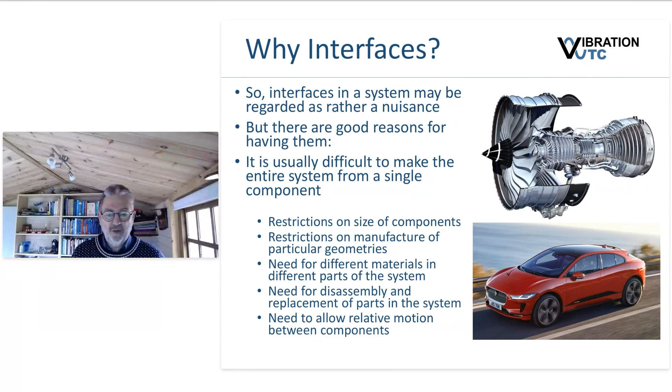If you look at something like that aircraft engine, and I've done a lot with aircraft engines over the years, you'll see there are thousands of interfaces in that system. The problem is they're not easy things to model. It turns out that one of the principal remaining uncertainties in our predictive models of complex systems is the behavior of the frictional interfaces there.

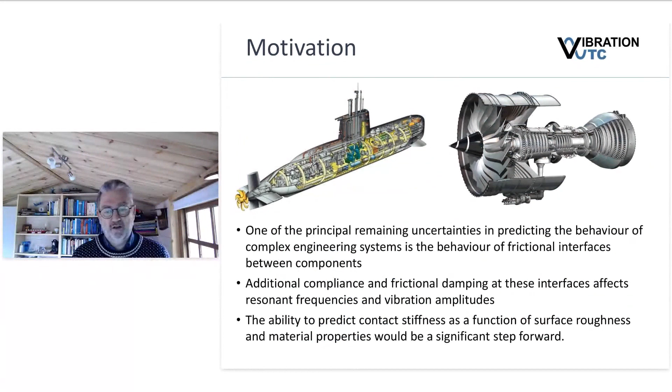These frictional interfaces do two things. They introduce compliance into the system, more compliant both in the normal and tangential direction than if we made the two components as one. Fortunately, the friction also introduces some damping at the interfaces, which is helpful from a dynamics point of view. But the trouble is it's non-linear, so that's a bit of an issue for us. The ability to predict contact stiffness as a function of surface roughness, material properties, and perhaps load would be a significant step forward in getting some of our uncertainty out of our predictive models of systems.

But unfortunately, from a vibrations perspective, we want to see some damping in our system because we would like our mechanical energy, our vibration energy, turned into heat and dissipated. In this second case, the worst system we can possibly have is one with either zero or infinite friction, because neither gives us any frictional damping. So we've got these competing requirements — if we try to design our interfaces, we find we're up against competing requirements depending on whether we look at the system from a solid mechanics point of view or a dynamics point of view. And in terms of structural integrity, the system behaves as a whole, and both of these issues are important.

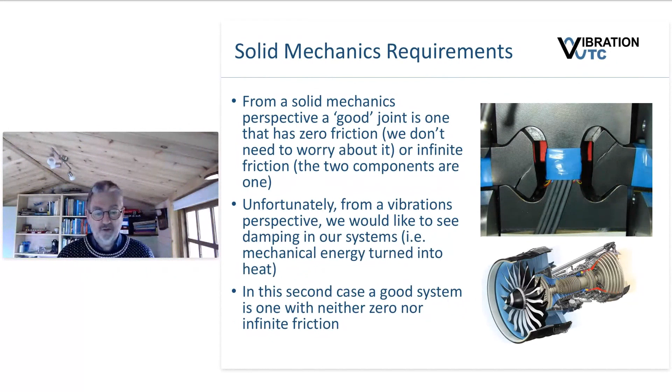You'll be familiar with this equation if you go back to your undergraduate studies: M x double dot plus C x dot plus K x equals some periodic force. This is the fundamental dynamics equation of vibration. I quite like it because it's got two of my heroes in it, Isaac Newton and Robert Hooke. Newton said force equals rate of change of momentum, or effectively in our case with fixed mass, force equals mass times acceleration. And Robert Hooke said, effectively, force equals stiffness times extension.

So those are those two terms, and the term in the middle, the C x dot term, is a linear damping term, which is what we get from viscous damping, linear viscous damping, like in a shock absorber in a car or something like that. That's fine, but our frictional interfaces are not going to behave in a linear fashion — in fact, they're anything but linear.

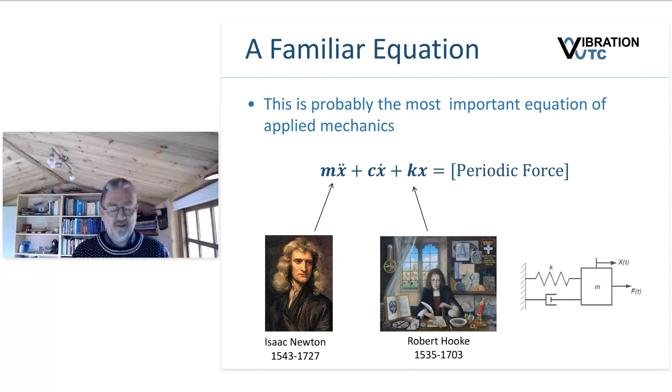Now, the normalized amplitude of response of a system depends on the frequency and on the amount of damping. You'll be familiar with this one-dimensional, single degree of freedom system here with a mass, a stiffness, and some damping. What you see is that as you increase the damping, the magnitude of the resonance comes down, and also the natural frequency changes.

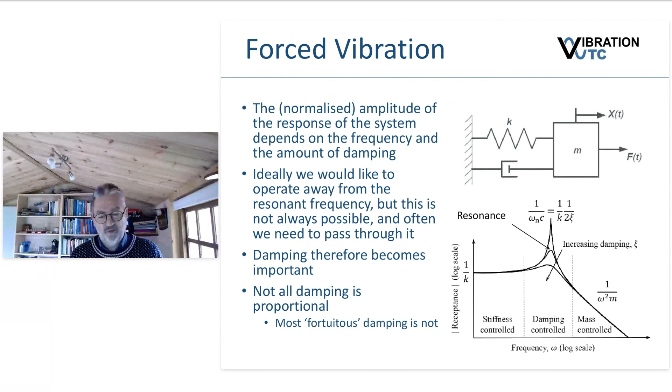Therefore, it's important to know what the damping is doing, what level of damping we have, and what's the effect on system behavior. But as I said, most real damping is not proportional, and so we need to understand what's going on a bit more carefully.

Now, I had a little video for this, but I was asked not to put videos in the slides. But fortunately, I do have the two gin glasses here, so I can actually do the demonstration for you.

So this is a standard gin glass, no gin in it, unfortunately. But anyway, this is one that I pinched from the sideboard. And if I hit it, hope you can hear that, it rings very nicely like a bell.

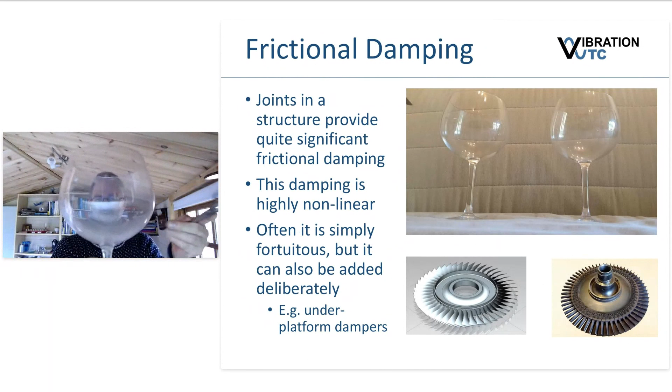This is one that's got a crack in it. You may be able to see the crack, you may not, but I'm going to hit this now. And what you can see is that it behaves completely differently. The main reason it doesn't ring is because there's a significant amount of frictional damping in the system. And sometimes in our systems, we have this kind of fortuitous damping.

So you'll see on the right-hand side that's a turbine disc with some blades inserted in it. And on its left, you'll see what they call a blisk, which is an integral bladed disc. Very nice because we can make the whole thing as a single component - it's cheaper to manufacture, lighter, and so on. But I think you can imagine that that one is going to ring a bit like our intact gin glass, and therefore we can expect significant vibration problems with that type of component compared to the system bottom right.

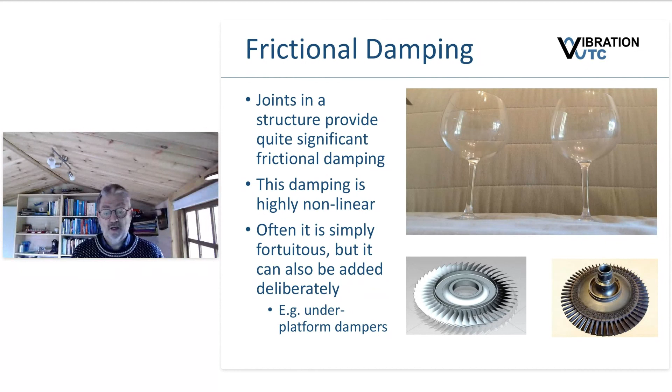Frictional hysteresis. What we find is that friction varies even during a simple cycle. So what we've done here is basically some reciprocating tests - we take two bodies and simply rub them against each other backwards and forwards in a fretting situation.

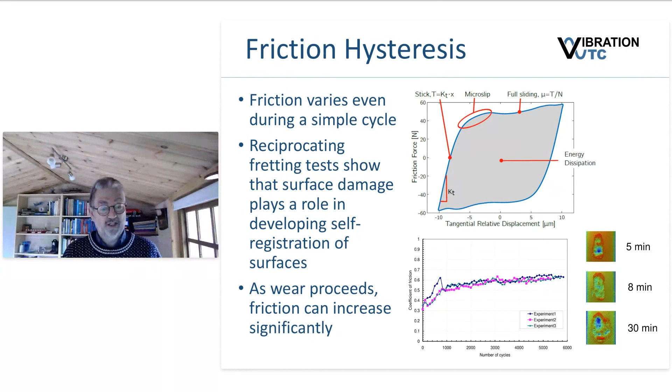As wear proceeds, as we get surfaces interacting like this in sliding, we'll get wear. And as wear proceeds, what we find is that the size of that hysteresis loop, characterized by the coefficient of friction, increases with the number of cycles, primarily because the real area of contact is increasing significantly. You can see that bottom right of the slide where we have wear scars at 5, 8, and 30 minutes into a test, and the real contact patch basically ought to be that complete square that you're seeing.

In terms of frequency response functions, the contact has two main effects on the vibration behavior. One is that the nonlinear frictional damping reduces the amplitude, and secondly, the presence of the interface makes the assembly significantly less stiff than if it were monolithic geometry, so we get a change in the natural frequency.

The other thing we find is that the effect depends on the state of the interface. So you can see here on the right hand side and in the main graph here, that the wear has shifted the natural frequency. It's reduced the amplitude in some cases, but particularly around this 180 hertz peak here, you'll find that there's been a quite significant increase in the natural frequency.

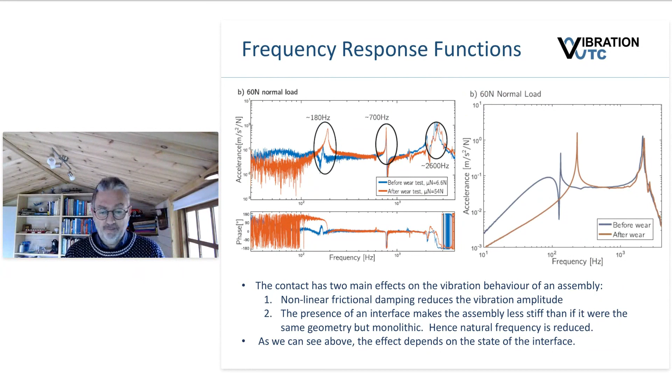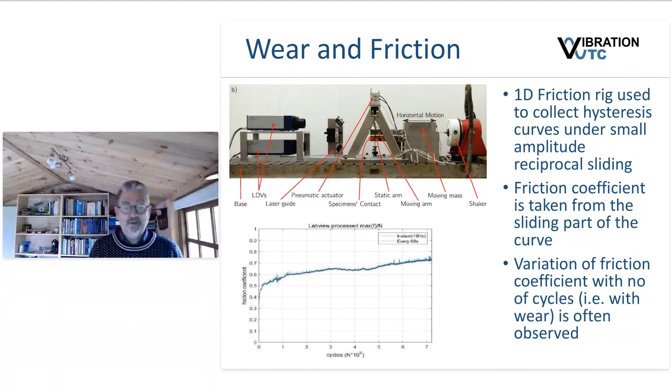So this is our little 1D friction rig, developed originally by my colleague Christoph Schwingshackl and his students. We use this to collect hysteresis curves under small amplitude sliding. And here again, we see the variation in friction coefficient as the experiment proceeds, basically as wear is taking place.

The behavior of frictional contacts is very complicated, but let me take you through what we hope to achieve in our research. We start with motivation, which is to understand the joints. We do some experiments, reciprocating type experiments often. We take measurements and characterize the surfaces. This is a toroidal ring on a flat, and you can see how the wear has proceeded. Then we try to do some modeling, and finally validate those models. That's what I'm hoping to take you through in the rest of the slides.

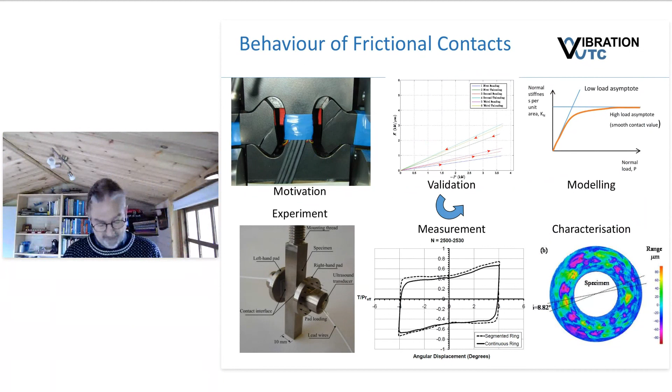My involvement with Imperial goes back a long way, and we had a joint project with Imperial many years ago. What we were trying to do was measure friction and compliance effectively on the same surfaces, but with different equipment. The Oxford equipment on the left is largely very low frequency equipment. It's quasi-static, relatively large contact, large forces, and so on. We measured displacement by digital image correlation or by a remote LVDT.

On the right is an earlier incarnation of the Imperial rig, and you can see that the contact area is much lower, 1 millimeter squared. Frequency is much higher, so it's a dynamic experiment, with much lower sliding distance, and displacement measurement is done by integrating laser Doppler velocity measurements.

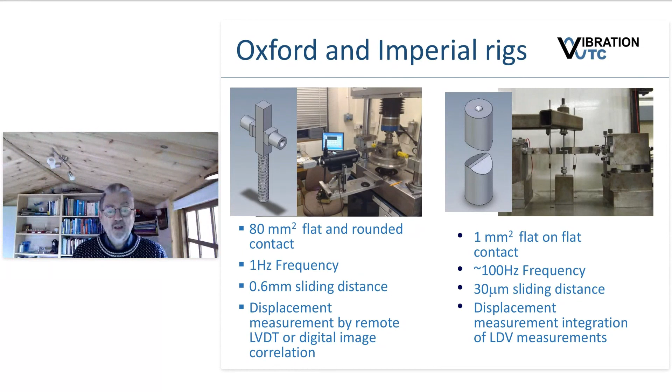Now, the results are quite interesting, particularly these two graphs on the right. What we've got is one surface with respect to another, and you can see that within the specimen, the vertical displacement under the normal load is approximately linear with position. Then as we go to the other side of the interface, into what we'd call the fretting pad, again we have a pretty linear displacement variation with position. That's what we'd expect if the two surfaces are being squashed together.

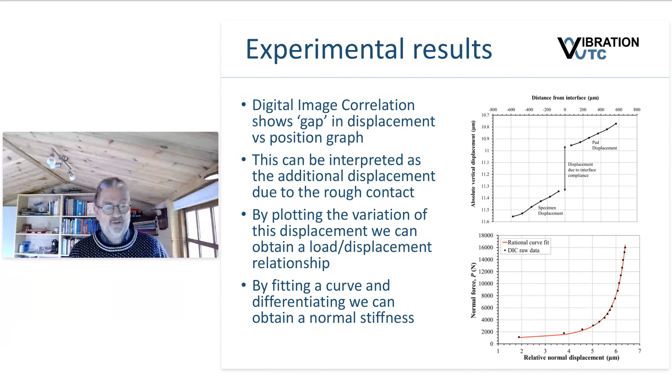But we have a big jump in between. That displacement jump is effectively due to the compliance of this rough contact layer, all these asperities which sit against each other on the surface itself. Bottom right, you can see that not only do we get that jump, but it varies with normal load, so that as we apply more and more load, the surfaces get closer together, as it were. So in order to bring them together by 6 microns relative to each other, we have to apply a very, very high force.

And so there's the normal stiffness. We can measure it that way with digital image correlation, and we can also do a little measurement with ultrasound - these were some results that Daniel Mulvihill got. You'll see again we're getting the same kind of effect where the normal contact stiffness is increasing more or less linearly with contact pressure or with load.

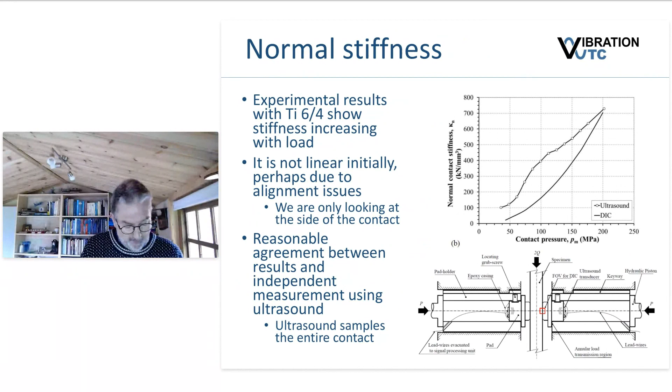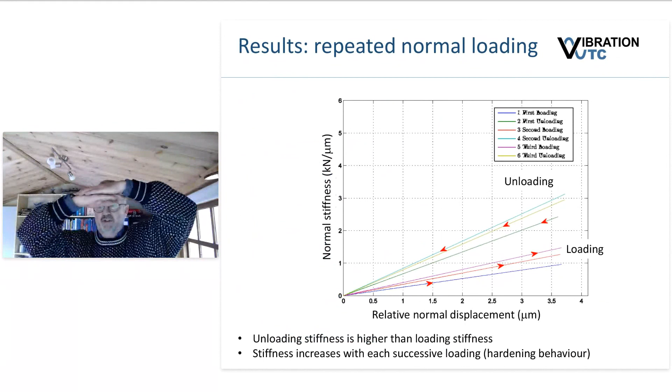We can do the same kind of effect but under repeated normal loading, squashing the two surfaces together, letting them come apart, then squashing them together again, and so on. We find two interesting things. First, the unloading stiffness is higher than the loading stiffness, which is probably something to do with plasticity. Also, the stiffness increases with each successive loading - you'll see those curves getting steeper through first, second, and third cycles of loading. That's to do with some kind of hardening behavior and perhaps some shakedown of the geometry.

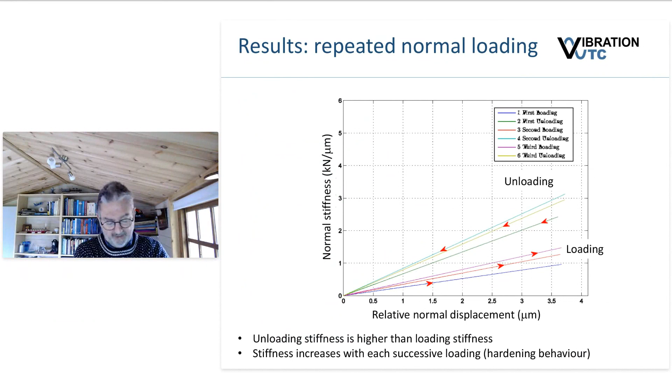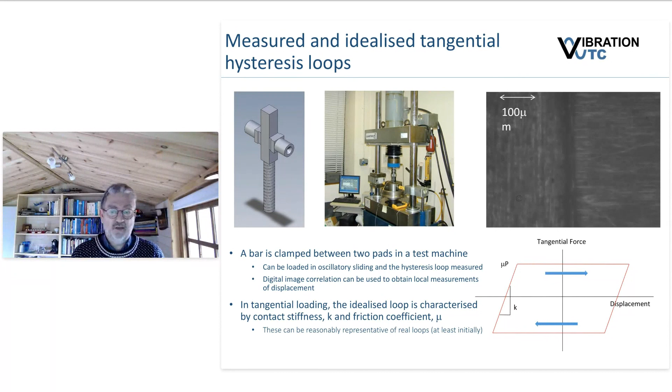We can measure these tangential hysteresis loops, and I showed you some of those before. When we do that, you'll see top right a real close-up which has got the pad on one side and the specimen on the other, with the interface between them. That's the kind of size of image we look at. So what we get from the loop is a representative friction coefficient and a representative stiffness. This now is a tangential stiffness - what we were talking about before was stiffness in the normal direction, and we have exactly the same effect in the tangential direction.

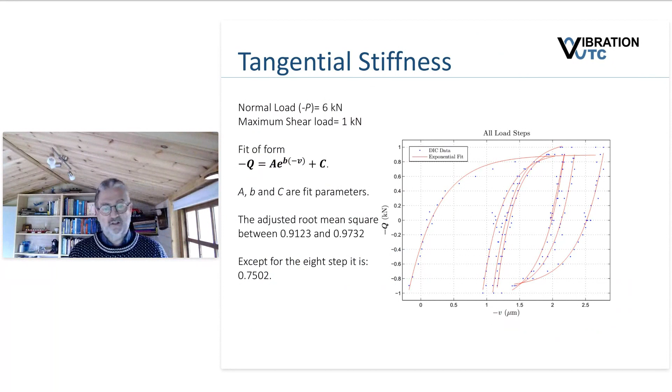And here we are, here's some loops. This is giving tangential load on the vertical axis against tangential displacement on the horizontal axis. Effectively, you see that in each reversal of load, it starts off linearly, and then we start to get tailing off of the stiffness as the gradient decreases and the contact is coming near to sliding.

We get rather similar effects here, so we find that we get some stiffening with repeated cycling. If you look on the left of that graph, the stiffness goes up from, if you like, 1 to 3 to 5 to 7. And then what happens is that stiffness decreases down to 0 as we get near to the point of sliding. Then when we reverse the load, it jumps back up again to values rather similar to what we had when we were sliding in the opposite direction.

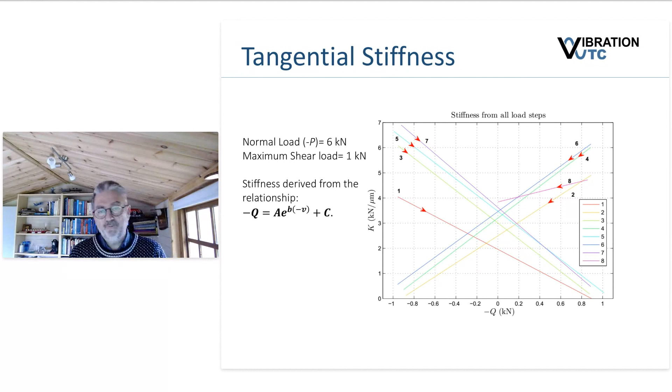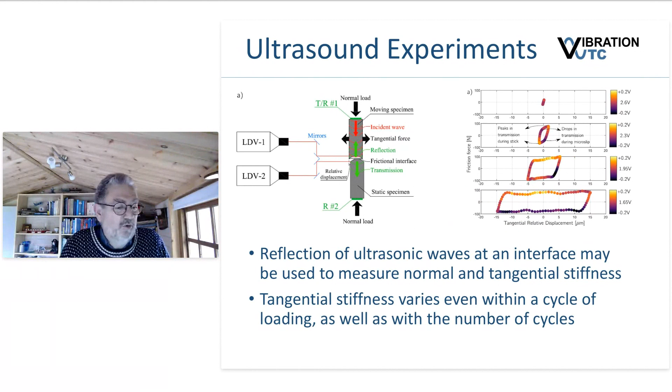We can even do now, and this is some of Christoph's work and his group's work, measurements of tangential and normal stiffness throughout the cycle. So we're doing continuous measurements of what's going on, and what's plotted on the right-hand side in those colors is that we are effectively measuring normal stiffness and seeing how that varies around a fretting loop. There is quite a bit of variation of normal stiffness around a fretting loop, and that's something we are trying to understand a little bit more carefully by looking at those results.

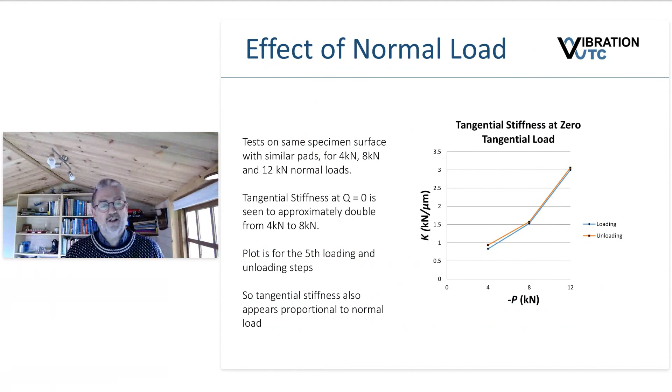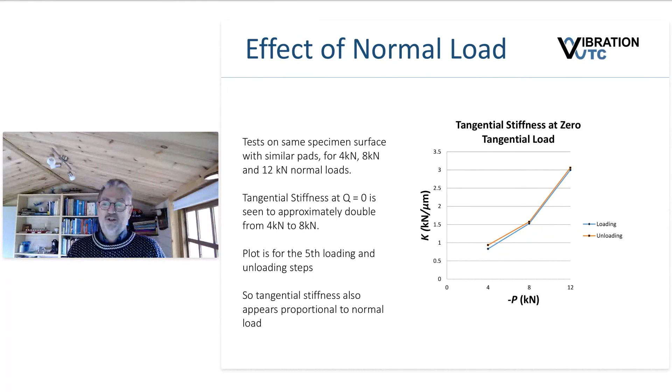Essentially, tangential stiffness varies with tangential load, but it also varies with normal load in much the same way as the normal stiffness varies with normal load. So we've got a very complicated situation here. We've got this extra compliance, or stiffness, one's the reciprocal of the other, at the interface, and the value depends on both - in the normal case, it depends on normal load, and to some extent on where we are in the fretting loop, so a bit on tangential load. Similarly, tangential stiffness varies with both normal and tangential load.

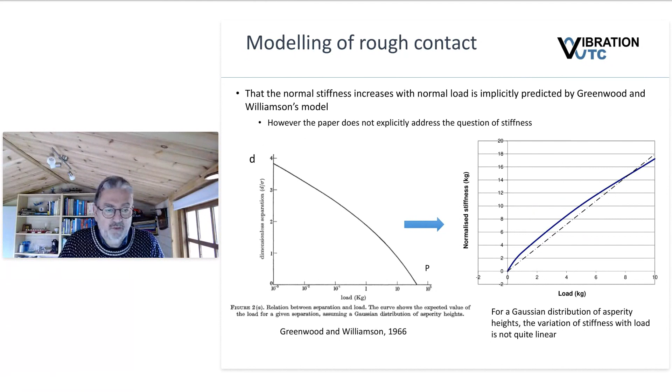Just to show you some rough contact models - coming back to the Greenwood-Williamson model, the normal stiffness increase with normal load is implicitly actually predicted by Greenwood and Williamson's model, but the paper doesn't explicitly address that question. And for a Gaussian distribution of asperity heights, we find that the variation of stiffness with load isn't quite linear, but it's very, very close.

What we've done in the past is taken the Greenwood-Williamson model and taken the same assumptions, which is a distribution of hemispherical elastic asperities with constant peak radius. The distribution of those heights can either be normal or exponential, and what that's representing is the tail of the distribution coming into contact, so relatively light loads. You assume that the behavior of each asperity is independent, i.e. light load. The results were published around about 10 years ago now by myself, Simon Medina and Daniele Dini.

What you see is that at low loads, the contact stiffness is proportional to normal load - that was what we measured. But at high loads, the stiffness needs to approach that of an equivalent smooth contact. So effectively, by putting more load on the contact, we can't make it any stiffer than the value implied by the bulk elastic behavior of that geometry.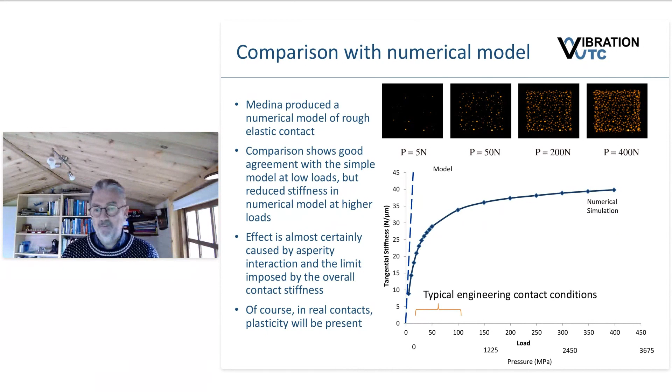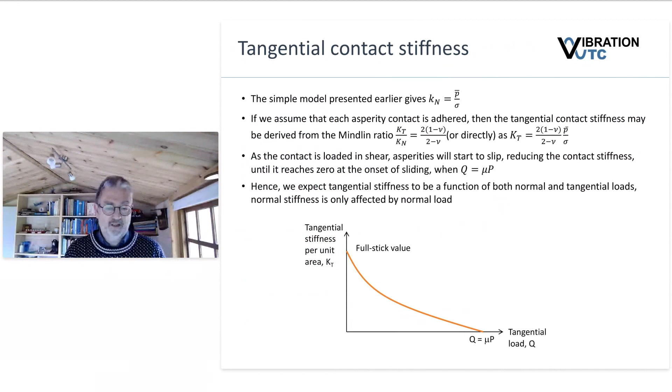Tangential contact stiffness - you can actually assume that the initial stiffness is related to the normal value, and then as the asperities start to slip, the tangential contact stiffness reduces. So the modeling side also predicts that we should have this behavior.

So there you are, that's about what I've got to say to you. I think what would one conclude from this? Firstly, I think rough contact interfaces are more compliant than we tend to assume in our finite element modeling, and therefore we're not going to make accurate predictions of things like natural frequencies of assembled components.

Secondly, the measurement of stiffness in real contacts is not straightforward, but it is possible. Easier with normal stiffness than tangential, but both are possible.

The simple elastic model predicts a variation of stiffness with normal load, and it's independent, interestingly, of the material elastic constants. This is consistent with the experimental evidence, and there is also, as we say, evidence for increase in tangential contact stiffness. Repeated normal loading seems to give a stiffer contact on each loading cycle, and this might be expected if the real area of contact was increasing.

And tangential contact stiffness decreases with tangential load. I suppose this is the challenge for the next generation of tribologists. There is a lot of work to be done before we can have a fully predictive model.

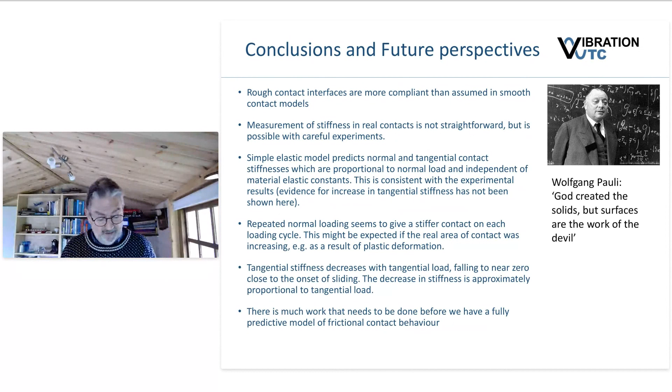And just to finish off with a few acknowledgements, lots of people have contributed to the work that I've shown you: David Hills, Daniele Dini, Daniel Mulvihill, Simon Medina, and more recently Alfredo Fantetti and Tong Wei. And the funding has been from a number of people, but principally EPSRC, Innovate UK, and in conjunction with Innovate UK, Rolls-Royce, through the UTCs, both in solid mechanics at Oxford and in vibration at Imperial.

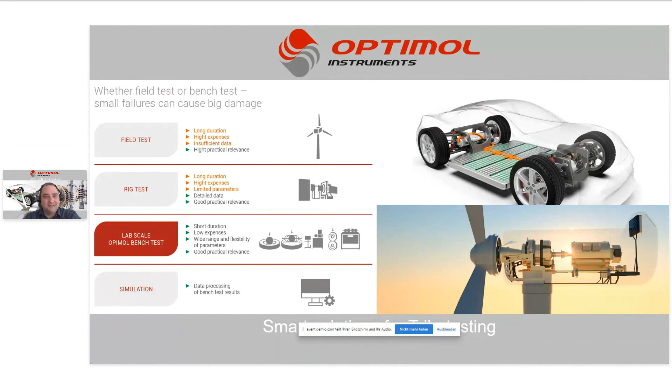Great, thank you. Thank you, David, for this very interesting presentation, I learned a lot. And today I would like to first shortly introduce myself, Gregor Patzer, General Manager at Optimol Instruments. We are based in Munich, Germany, and our target is to develop.

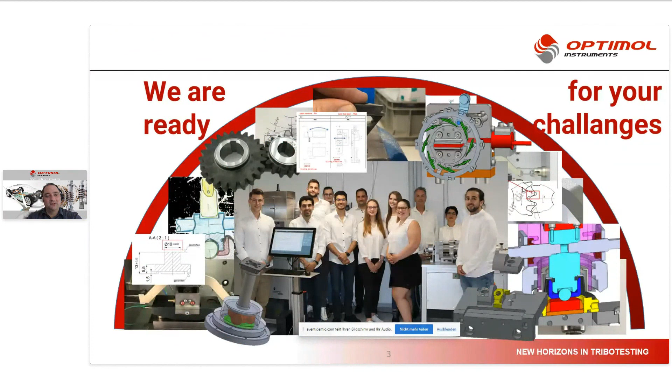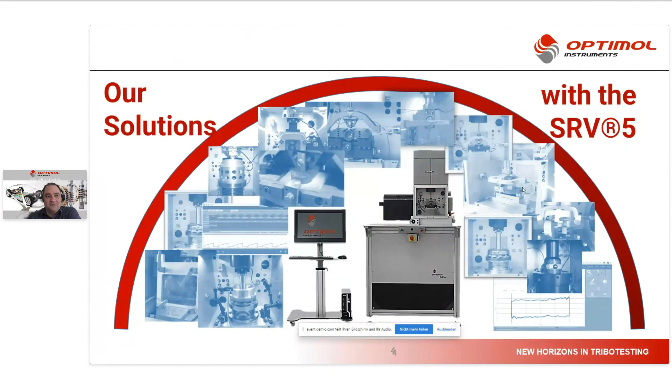For more than 50 years, we've been developing practically relevant test scenarios for tribological challenges that enable you to gain as much knowledge as possible already at the lab scale. And this is our main topic. We develop test scenarios, and of course we also develop our own test rigs, tribometers, that always focus on practical applications. This is what I want to show you with a few slides today.

So why do we do it? It's quite obvious. By doing lab scale tests, you have a shorter test duration than in the field or on a rig test. You have lower expenses, very flexible parameters, and good practical relevance if you develop the right testing methodology. And on the other hand, you have a very good and quick data handover for further simulating.

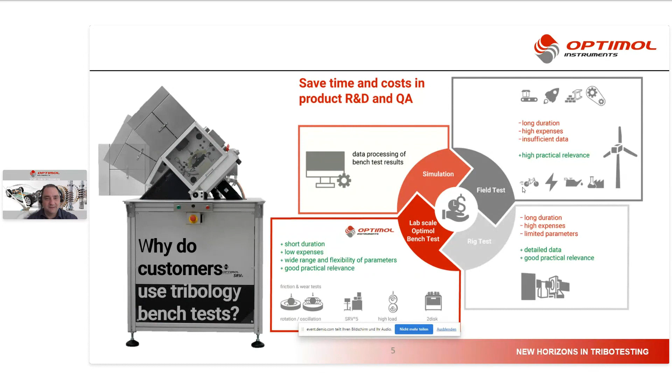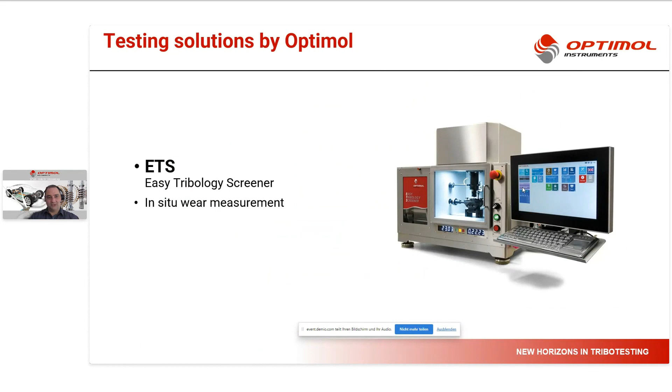So I will go quickly through some of our test rigs. The first one is the smallest one, ETS, Easy Tribology Screener, a very useful and simple to use tribometer for reciprocating tests. And instead of talking a lot, I will show you a short video presentation of this instrument. Congratulations.

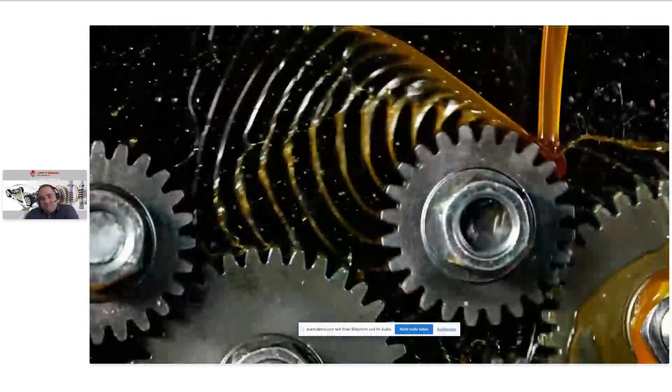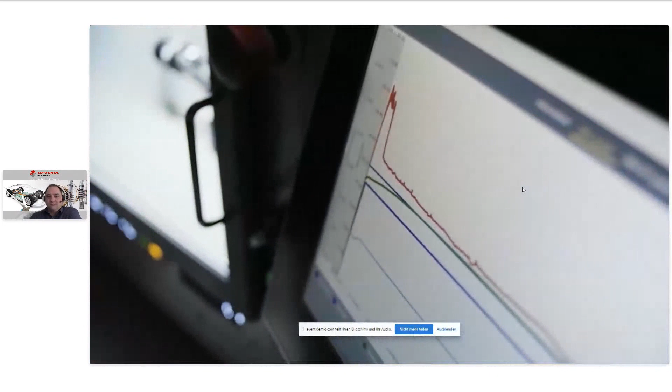By watching this video, you seem to appreciate the importance and the cost-saving potential of tribological measurements. By taking advantage of our new technologies to reduce friction and wear, you are willing to improve your business. Fast, precise, and cost-efficient. We believe in perfect engineering, and we believe that knowledge is power.

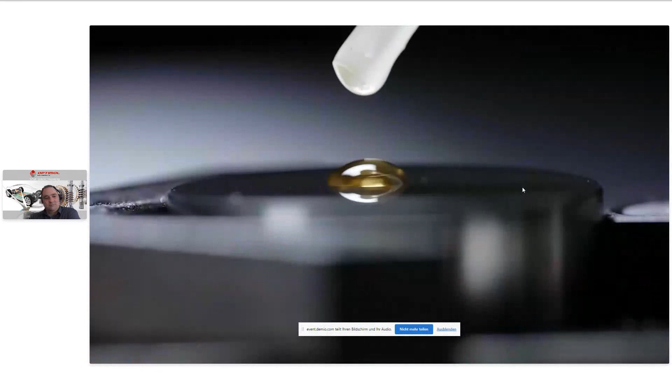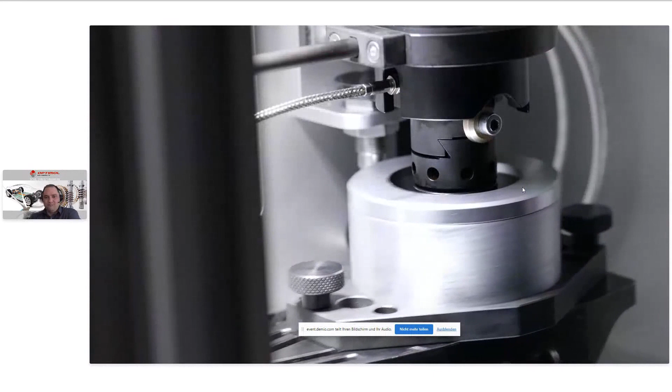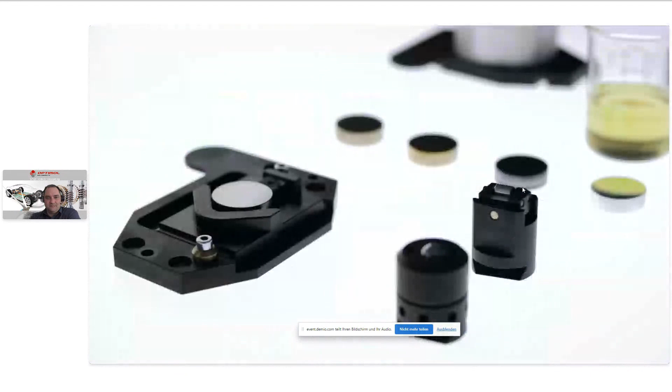We believe in flexibility in order to innovate and to grow. Having agile and fast ways to measure and gain knowledge is paramount to succeed. We believe in preventive maintenance in order to act sustainable and cost efficient. We believe in success by being able to adapt, not by being the strongest. Don't get us wrong, technological strength is what we essentially deliver.

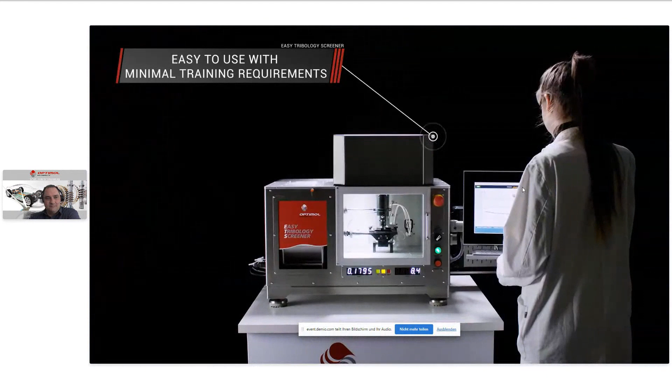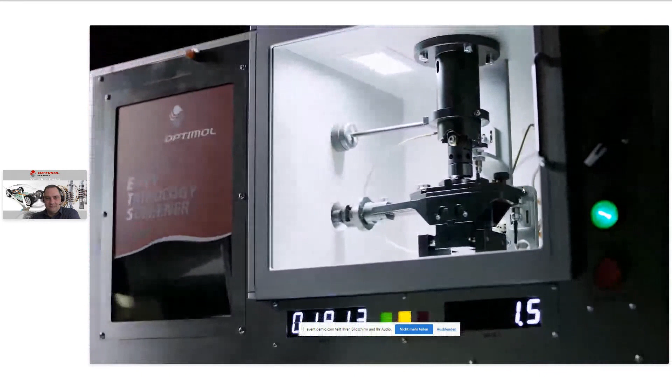To give you a short overview about the parameters of this tabletop tribometer, it's tailor-made for fretting tests with low to medium loads, very small stroke lengths, and frequencies exactly in the range usable for fretting tests. Temperature is variable from room temperature up to 200 centigrade. And the big advantage is that you also have in situ wear measurement, where we measure the wear in terms of length during the test.

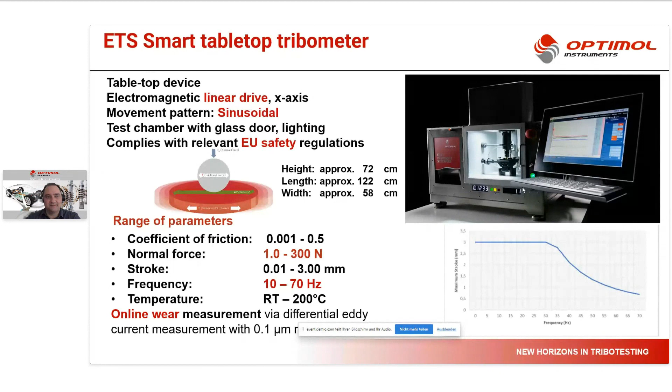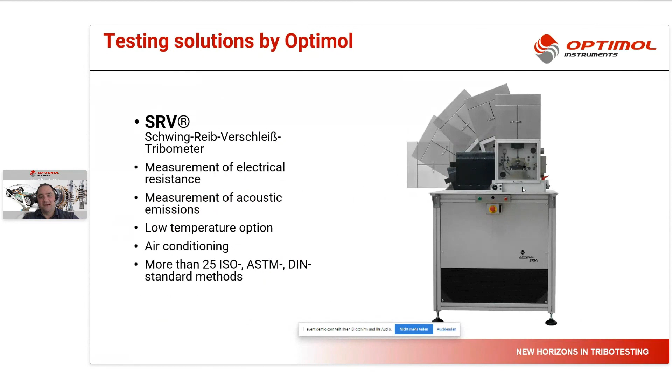The other very famous and very familiar instrument to the industry is the SRV with many standard methods. And don't worry, today I won't talk about all the test methodologies and methods and standards that we provide for the SRV, but I want to point out 3 small case studies.

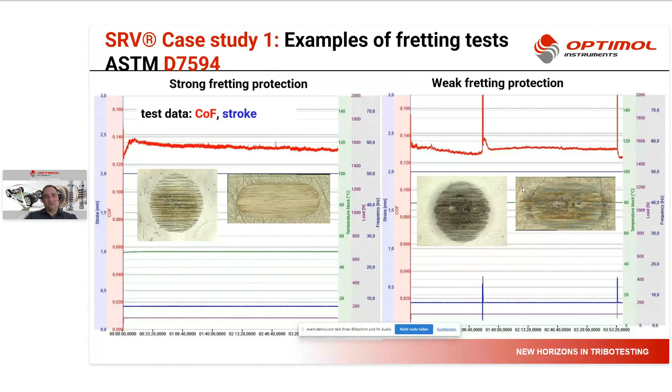The first case study is the fretting test according to ASTM D7594, which is now also in the NLGI spec for high performance multi-use greases. And here I also have a small video tutorial showing how easy and simple it is to run SRV tests.

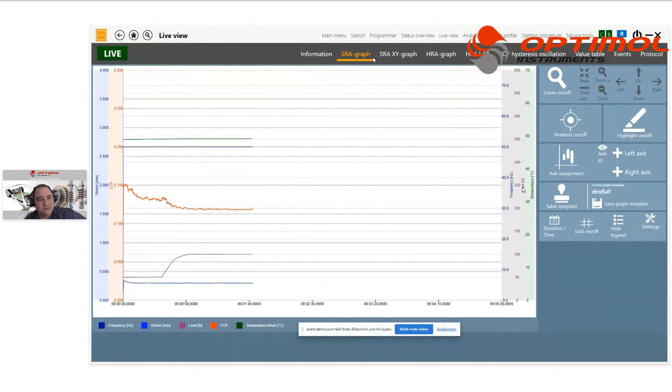First you install the samples. For all the standard methods, you need ball on disk geometry, which is very cost efficient and allows you to do a lot of different parameters. The procedures are already preset and pre-programmed in the software. You just start them by pushing one button, and then the test runs fully automatically. Data is recorded and in situ visible.

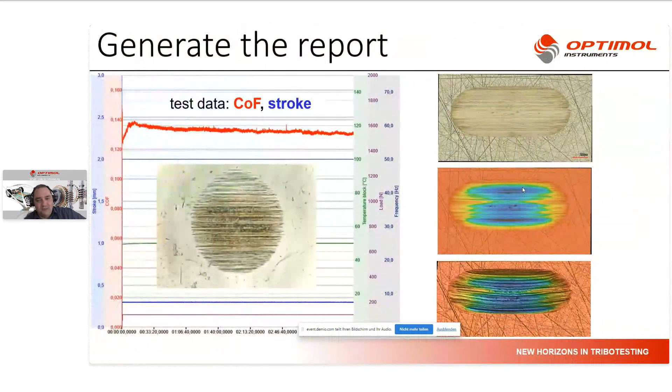After running the test, you can process all the data within our software. You can export the data and hand it over to other calculation softwares. And of course, at the end of the test, you do the microscopy of the wear scars to measure the wear depth, wear volume, and wear scar diameter according to the standard method.

You can also increase the throughput in your lab and save on operators' time by doing the tests automatically. With our APOS option, we enable our customers to run up to 16 tests fully automatically.

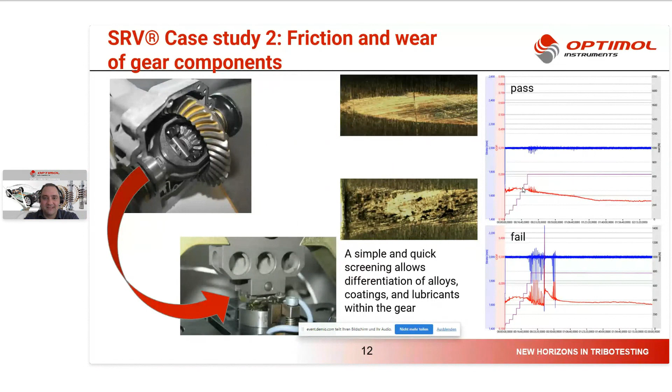The second short example I want to show you are tests targeting gear components, where we developed a quite simple but very transferable test procedure for gear fluids and gear materials on a model base, where we can easily discriminate the different scuffing performances of materials and fluids.

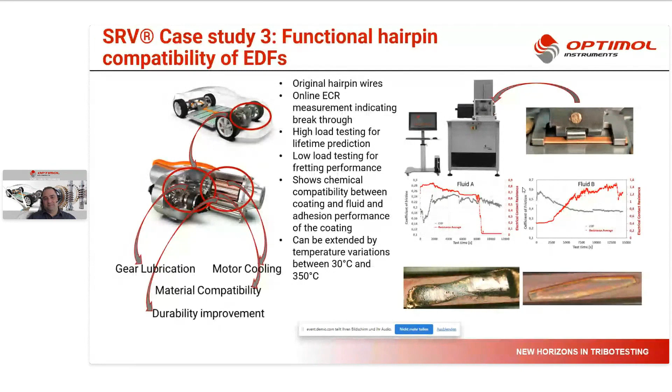The third interesting case study, because we have a lot of demand from the market today, is targeting EDFs, electric drive fluids. Especially here we developed a method to dynamically test the compatibility of the stator wire with the EDF, and by adding electrical resistance measurement, we can easily see at which point we have the breakthrough of the isolating coating. You see easily how different the damage mechanisms look after the tests.

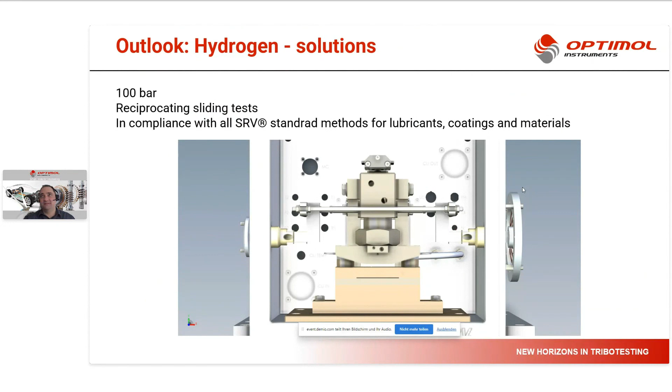One other very interesting development that we did, and are recently installing at 2 research institutes, is a hydrogen test cell up to 100 bar gas pressure. The volume of the gas is so small that there's no risk of explosions, and it allows you to run standard test methods under hydrogen atmospheres.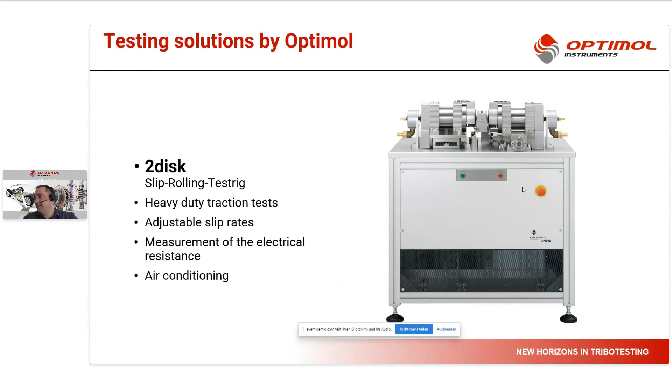The third test rig that we have at Optimol Instruments is the 2disk rig, where we are doing slip rolling tests, basically targeting fatigue mechanisms, but also abrasive wear under dynamic slip roll ratios is possible.

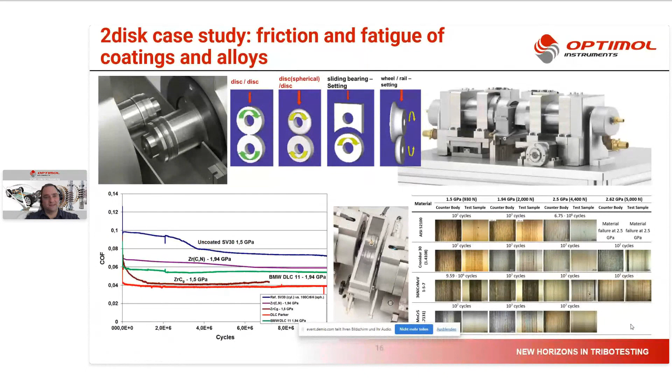Results look like that. You have the online recording of COF values and other interesting data like acoustic emission, electrical contact resistance, and so on. You have varying sliding speeds, varying slip roll ratios, varying contact pressures, and then you can easily do test matrices with different materials, different lubricants, different coatings, whatever is interesting for your research.

With this, I'm at the end of my short presentation.